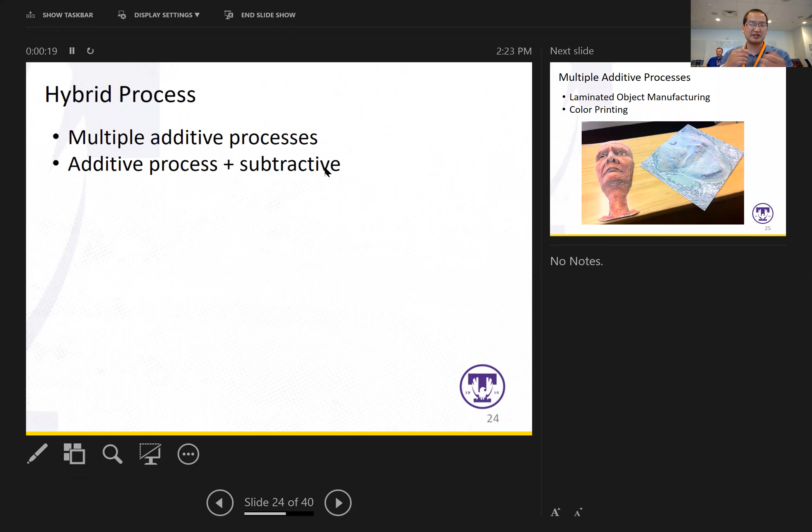All right. So in last class, we described some of the future or ongoing development of additive manufacturing, and one is the multi-additive process. Another one is the combination of additive process plus the subtractive ones, right? So we mentioned this application. Actually, we described this when we talk about the LOM process, right? So basically, it combines the LOM process plus the color printing, such that you could make some full color objects.

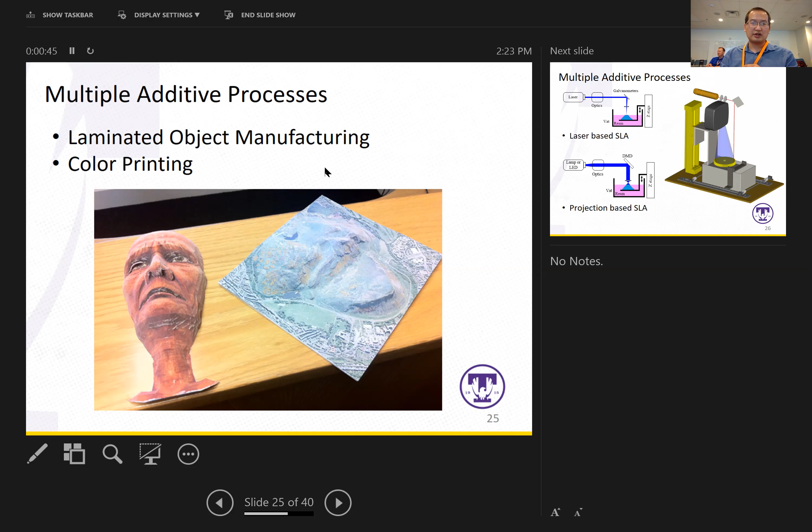And another process is this laser. So basically, it's a combination of two different SLA processes. One is laser-based, another one is projection-based. Basically, the idea is using the combination of the two processes to build those objects with large areas. Because the laser-based ones usually have better resolution or surface finishing on the built part. At the same time, the projection-based one has a more efficient process compared to the laser one.

So how about to combine the two together, such that for the contour part, use the laser-based SLA, but for the interior part, use the projection-based SLA process. So it turns out there will be the hybrid process by utilizing the two processes. And here, this shows a possible implementation of this process. So I would like you to have some little discussion on this kind of process. What could be the problems, and what do you think about the combination of the two?

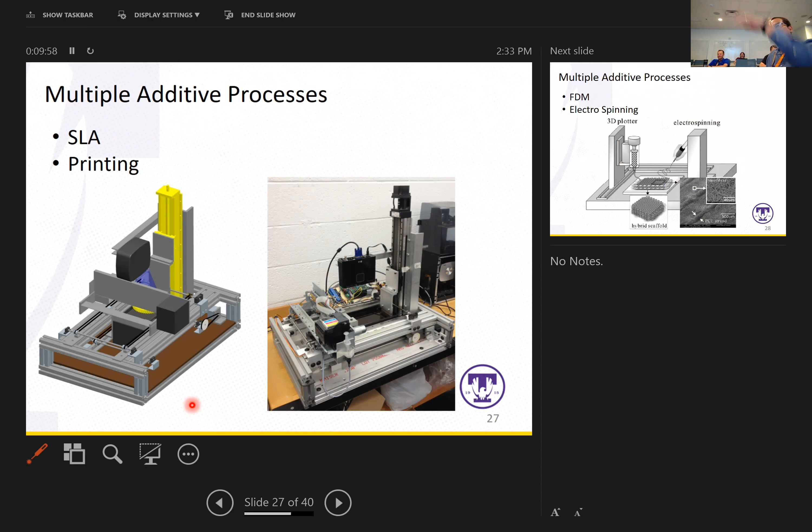So is that like a printhead type thing that he's using to scan the laser? Because it doesn't seem to have an optic. Here, there is one. It doesn't seem to show in this one. This is maybe a different process. I think in this figure it's just not there on top. But for this one, you can see it has a laser to do the process.

And another design choice he made is he used top down rather than bottom up, right? For most of these laser-based ones, the system usually adopts top down rather than bottom up. I remember one of you mentioned that could be because of the reflection of the laser when you scan the pattern from the bottom up. I think that could be a concern behind the design decision made here. All right, we can move on.

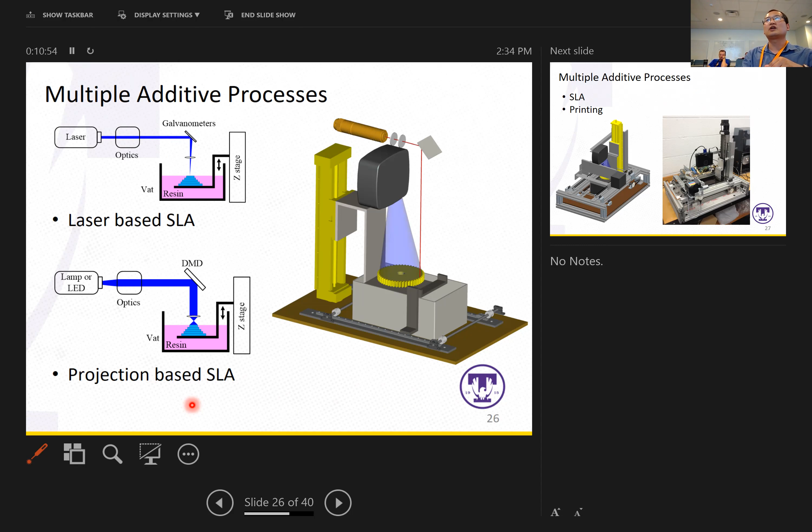So another kind of multi-additive process, like the one shown here, is basically a combination of fused deposition modeling and a spinning process. As you can see, the material is spun in a certain pattern and then added onto a substrate, generating each layer by layer. That brings freedom to the structure of the material by introducing the spinning process. And you can see very complex shape structures like this could be generated using this kind of process.

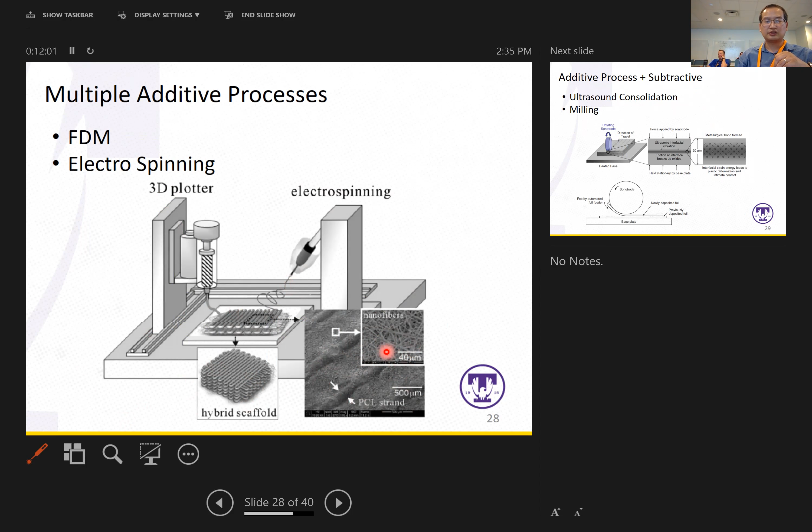Yeah, it's kind of fiber. And some other process, actually this has been introduced when we talk about the laminated process. Basically, this process utilizes ultrasonic consolidation. It will generate the initial shape using ultrasonic consolidation, and then apply a milling process to remove material from the actual parts, right? So it's a hybrid process of the additive process and the subtractive process.

So have you? Yeah. I guess that's Fabrisonic, trying to figure out part of our target stuff. Have you ever had any dealings with Fabrisonic? Anybody else? I didn't do any process with this, but from the concept, I think it's understandable. It shouldn't be a problem. But to me, this process is quite limited in terms of the materials and also the mechanical properties of the final part.

Yeah. They're doing pretty well with aluminum, but talking about stainless, it sounds like they have issues with their little roller, ultrasonic thing. But what we're looking at for the target is having better fiber optic strain gauges around the target. Right now, the glue won't live in radiation. So it sounds like they're talking to ORNL on another project, they're embedding fibers with Bragg gratings for strain measurements. Do the same thing with our target.

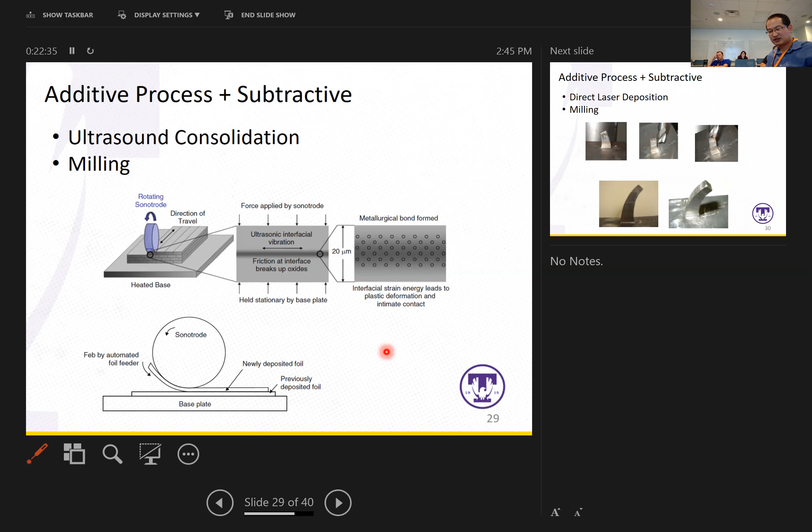Okay, let's move on. Another process is this direct laser deposition based process plus milling. As you can see, this kind of curved horn shape can first be deposited by this process and then fine-tuned by a milling process. I like this kind of process a lot because it has multi-degree freedoms plus multi-process. To me, it's kind of the future direction for the process.

This gives you an idea, even for this shape, although it's not that curved. But imagine if you have an even more curved shape, you could adjust the orientation during the deposition process such that you don't need to print support material. Then after printing, you could just use the milling process to fine tune it.

And not only for direct laser deposition, but those WAAM processes share a similar concept. Although the accumulation of material could be different, it shares similar features - multiple degrees of freedom, and it requires fine tuning.

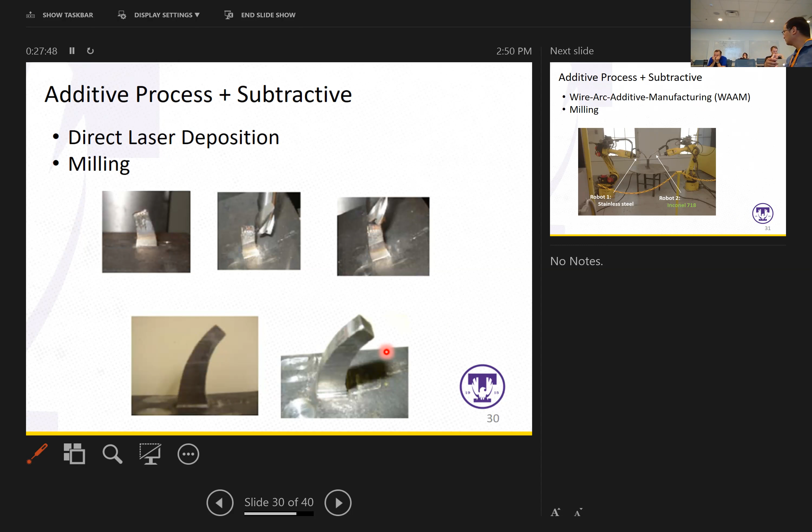For this WAAM-based one, I think the most attractive point for this process is it could generate those bigger objects. And also, if we make the robots mobile, meaning it can move, then some scenario like mobile additive manufacturing could be the case.

For a big object, you could decompose it into different parts, and several robots will focus on one portion. Then as they move, they can do the assembly together. It's like swarm manufacturing, so you'll deal with the collaboration between different robots and different portions. That's why this kind of process also attracts me.

Actually, this setup is from Dr. Kim, and I'm teaming up with him. I will focus on the planning and the algorithms, and he's building up his hardware test bed.

I think you guys also have a setup in the DML. So any thoughts on this?

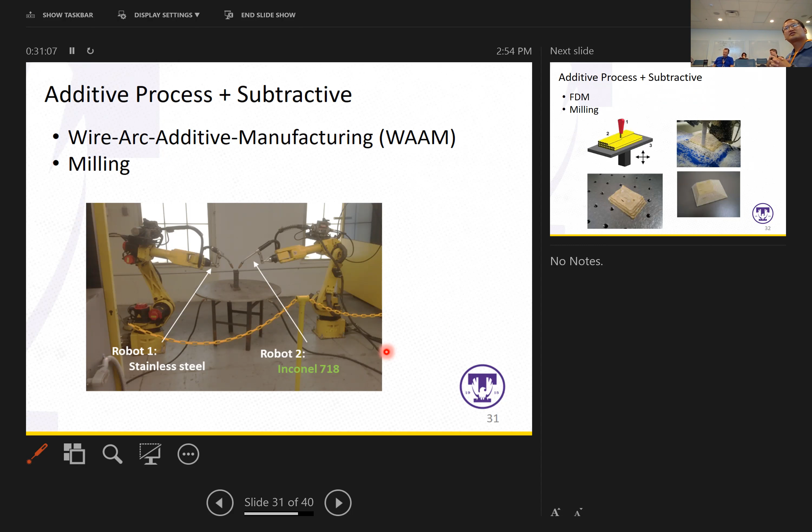Another example of additive plus subtractive will be this - FDM plus milling. But I'm not a big fan of this, because you can see after all the printing plus milling, you still have something - you want to do some beautification on it, some sanding or other process.

Their nozzle temperature definitely - so one comment on these photos, is that a 3-axis milling machine they're using to get rid of the staircasing effect? Or kind of - yes, that's what they're doing, they're just reducing the staircase size, right? Basically, it's better for the part, but it's hard to tell if it's better or not, but having another axis of motion might help get a better finish.